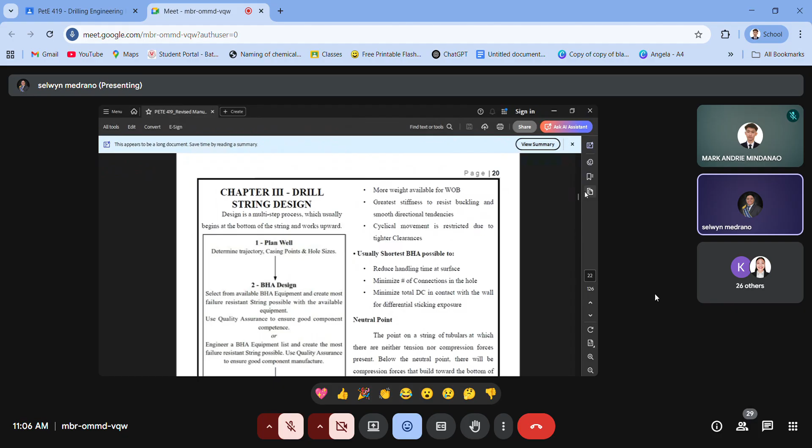And in order for us to design this drill string, we need to consider several factors. Later on, we'll be discussing the computation part for chapter 3, kasi we have already discussed it with O1 last week pa. So technically hindi naman siya behind, but you are one topic behind from O1 since di rin naman kami nakapag-meet last week. Okay, anyways, so in order for us to design a drill string, we have these 4 major steps.

So first one is to have a well plan, or we need to plan the well. So basically, we need to determine if we are to have a vertical well or a deviated well. If we choose deviated, paano yung trajectory po niyo? So later on chapter 6, if I'm not mistaken, we'll be discussing directional drilling. So doon natin madidiscuss kung ano yung purpose ng directional drilling, para saan po siya.

Then we also have the casing points and the hole sizes. So for the hole sizes, syempre we need to consider yung size ng ating mga casing na gagamitin, in terms of the conductor casing, surface casing, intermediate casing, and the production casing.

Next, we have the BHA design. Pag sinabi natin BHA, it is the bottom hole assembly. So yung bottom hole assembly is from the drill bit papunta doon sa drill collar and the heavyweight drill pipe. Actually, it's more of yung sa mismong bottom hole assembly. So yun yung nasa pinakababa.

Then, in order for us to select this one, syempre, depende pa rin siya doon sa type ng ating formation, kung siya po ay in terms of the design or in terms of the design calculation that we need to consider. So, nakabase po siya doon sa condition or sa ating mismong formation, kung siya ay hard in terms of the hardness, kung siya ay medium or kung siya ay soft. Depende rin po siya sa condition ng ating formation, kung siya high pressure, kung siya ay high temperature, kasi this bottom hole assembly can be subjected to high pressure and high temperature.

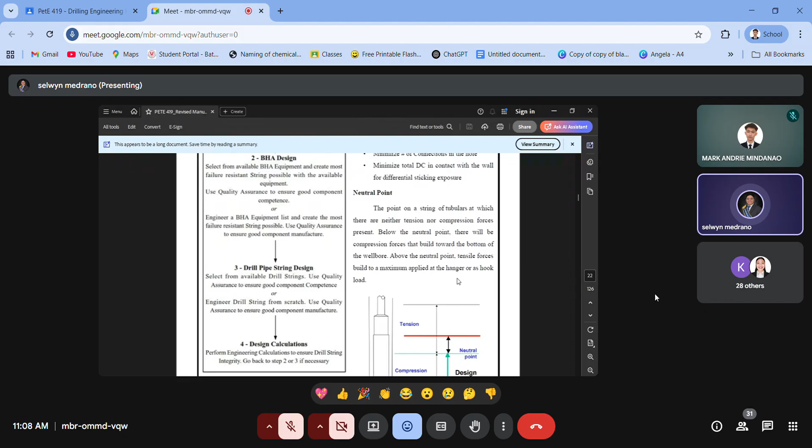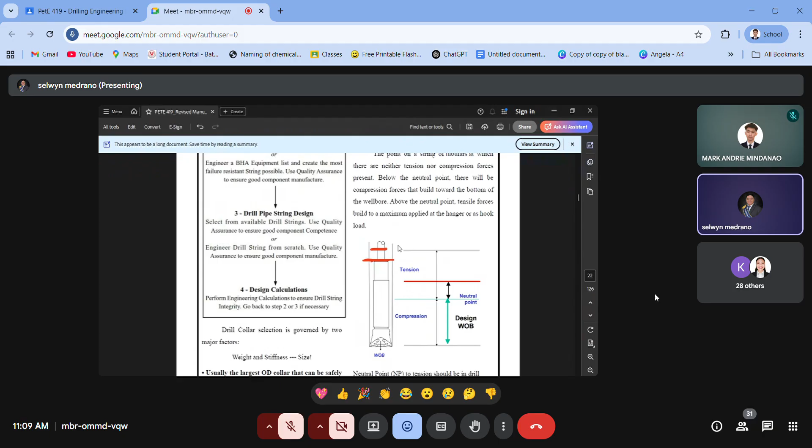pinakamahabang part. Actually, parang ganito siya. Kasi ito yung sa BHA, di ba? Ito yung BHA from up to here. Actually, yung paunang part din ng kasama na drill pipe, but the drill pipe is extending up to the surface. So the BHA is this one, then the drill pipe is yung nag-extend to the surface. And syempre, we need to have the design calculation for this, yung sa drill pipe and sa BHA design. Okay, so for this design calculation, we are considering yung mga burst pressure, collapse pressure, and yung body yield strength. Later on, we'll be discussing those calculations. Okay.

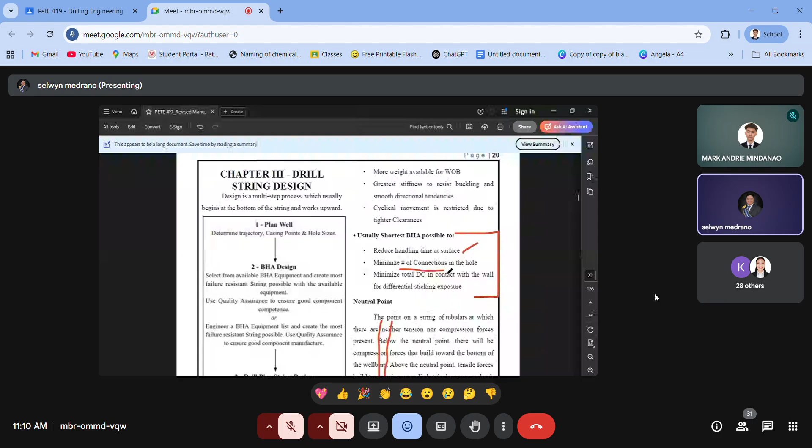So for the drill collar selection daw, meron daw po tayong dalawang major factor, yung weight and the stiffness. So this stiffness is considered when our well is non-vertical. Pag sabi non-vertical, it is deviated. It could be horizontal or it could be directional. Okay. So usually the BHA daw po possible to reduce the time at surface, handling time, minimize the number of connections in the hole, and it minimizes the total drill collars in contact with the wall for differential pipe sticking exposure.

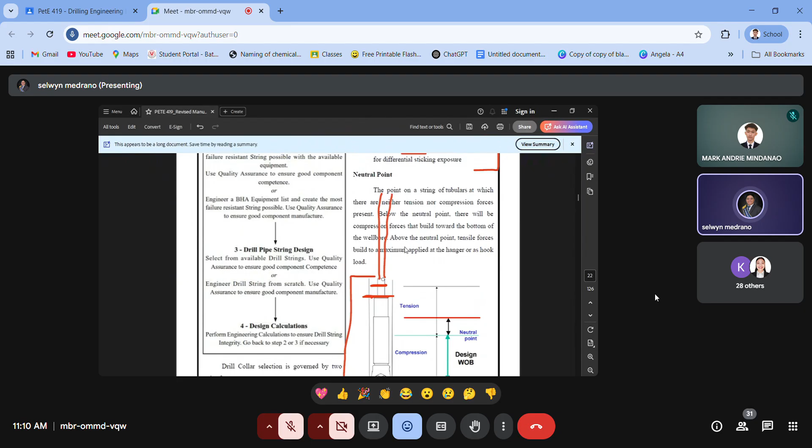Okay. So we have here this concept of neutral point. So actually we have two types: the neutral point of tension and compression, and the neutral point of bending. So pag sinabi neutral point is siya yung part ng ating drill stem or yung mismo BHA at which yung in terms of the compression and tension siya ay 0. So that is the neutral point of compression and tension. Kapag neutral point of bending naman, yung bending or yung actual load niya is 0 as well. So siya ay at equilibrium at that particular point.

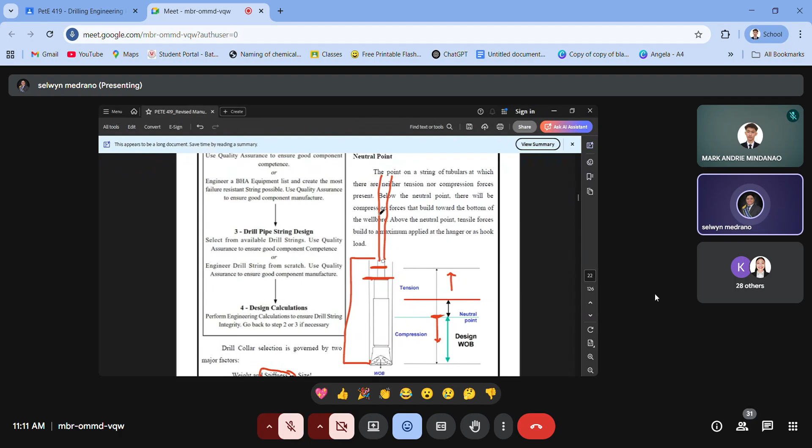And as you can see, the neutral point daw is dito. So ito yung neutral point niya kasi yung tension or yung away from the body and yung compression towards the body is siya. Kumbaga there is no presence of either the tension and compression. Kaya siya tinawag na 0. Kaya siya tinawag na neutral. Hindi siya compression, hindi siya tension. Then for bending naman, it is where the sum of the moments naman is equal to 0. Yung actual stresses. So that's it.

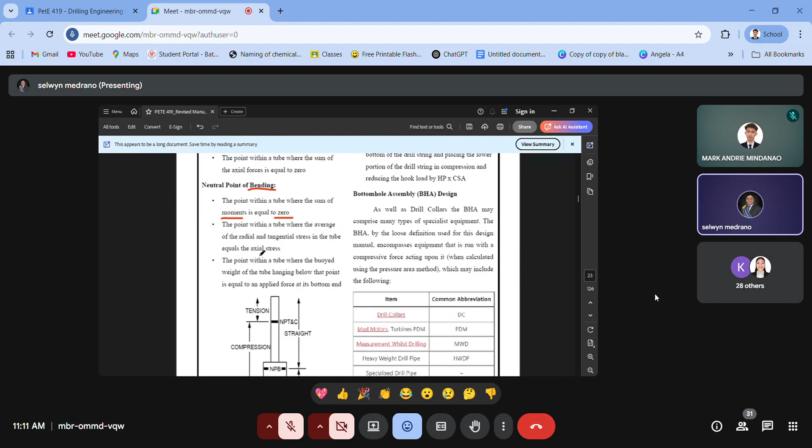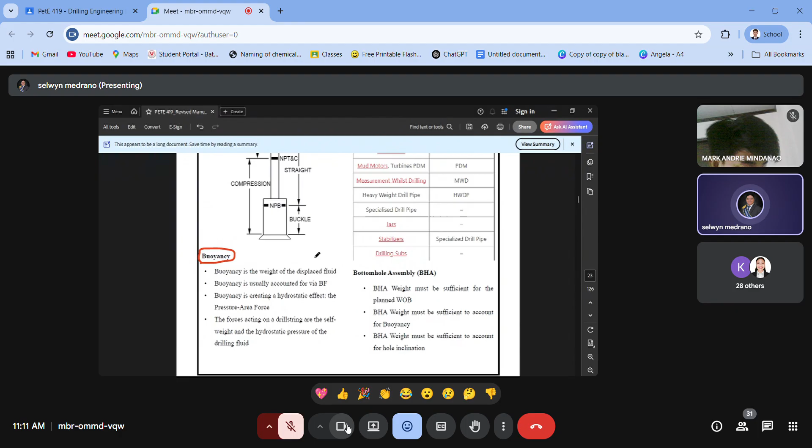Then we also need to consider the buoyancy. So buoyancy naman is not new on your end. Yan naman ay sa physics pa lang ay nadidiscuss na. So buoyancy daw is the weight of the displaced fluid. Kasi syempre, sa drill string, hindi naman hangin yung present dyan, finifill natin yung ating borehole with drilling fluid. So technically, we are to consider the buoyancy. Okay po.

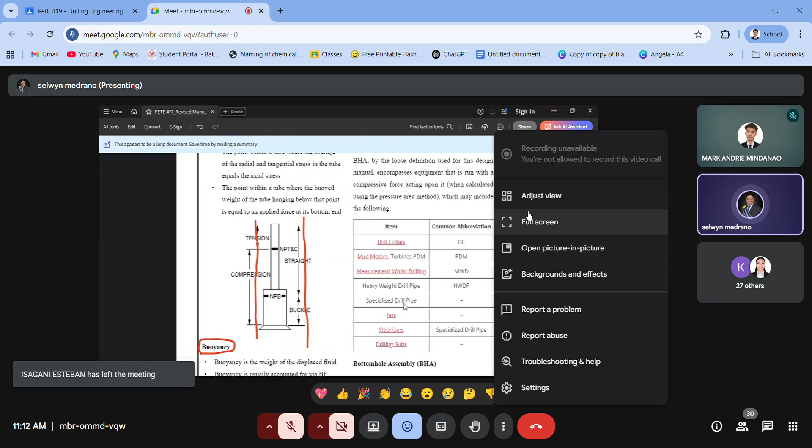Yun, nag-open. Okay, so we have the BHA design.